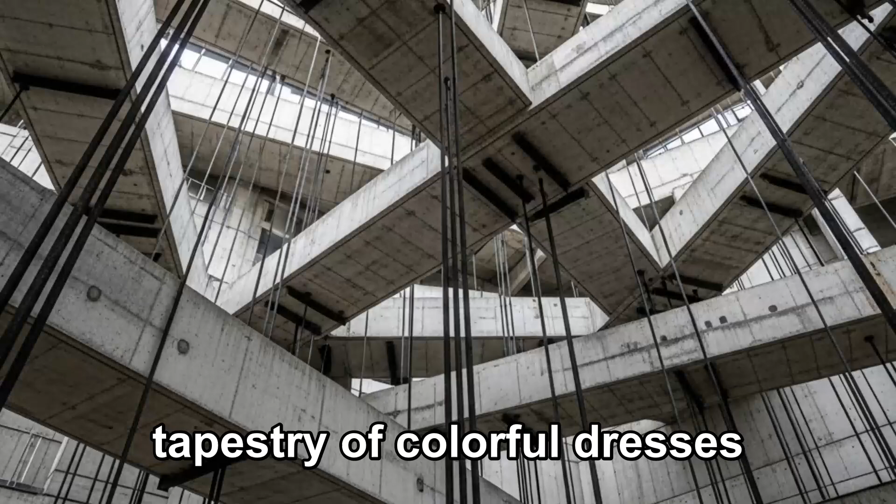Imagine a room filled with the warm, brassy sounds of a big band orchestra. It is July 17, 1981 at the Hyatt Regency in Kansas City, Missouri. More than 1,600 people have gathered in the hotel's soaring, sun-drenched atrium for a tea dance, a nostalgic celebration of music and movement. The atmosphere is electric, a vibrant tapestry of colorful dresses and sharp suits. Couples are swirling on the ground floor, while hundreds more lean against the railings of the majestic suspended walkways that crisscross the lobby high overhead.

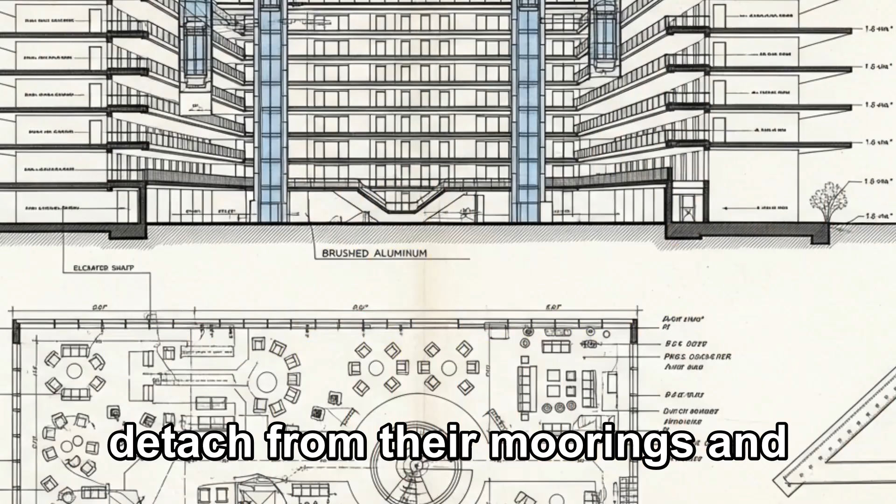Then, at exactly 7:05 p.m., the music is punctuated by a sound like a high-powered rifle shot. It is the sound of steel screaming under impossible pressure. Within seconds, a massive shadow falls over the dance floor. Two concrete and steel walkways, weighing tens of thousands of pounds, detach from their moorings and plummet through the air, pancaking on top of one another before crushing the crowd below. Dust fills the air, thick and gray like a fog, turning a scene of celebration into a graveyard of twisted metal and shattered glass. This was not a natural disaster, it was not an act of God.

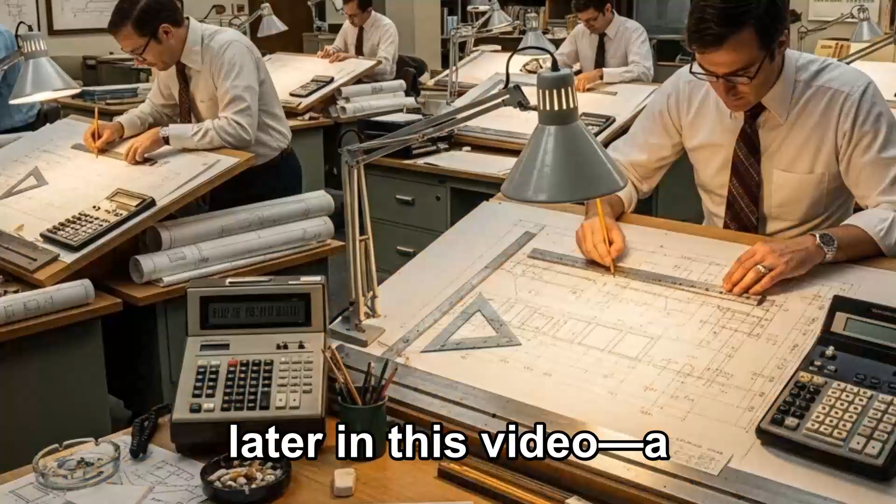It was the deadliest structural failure in United States history until the collapse of the World Trade Center towers 20 years later. But the most chilling part of this story isn't just the finality of the collapse, it is the revelation we will uncover later in this video, a revelation that proves this entire tragedy was caused by a simple, minor change to a drawing that a professional engineer failed to double-check. A mistake so basic that a first-year physics student could have spotted it, yet it remained hidden in plain sight for over a year.

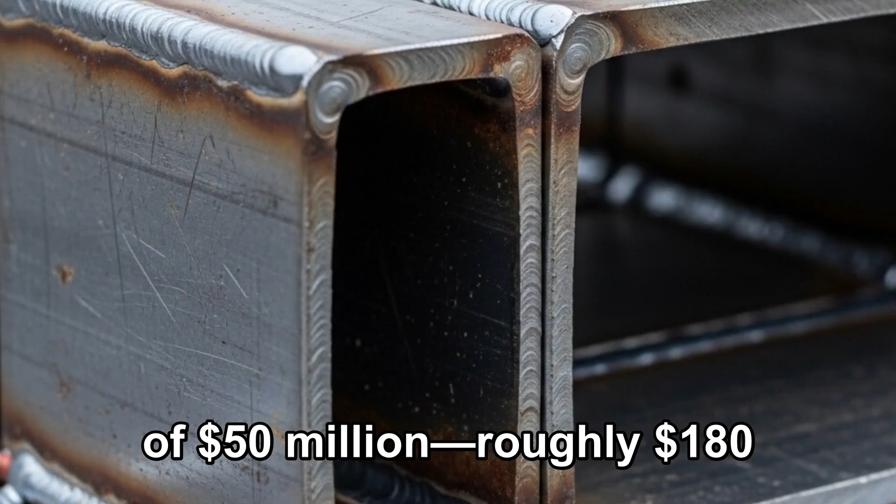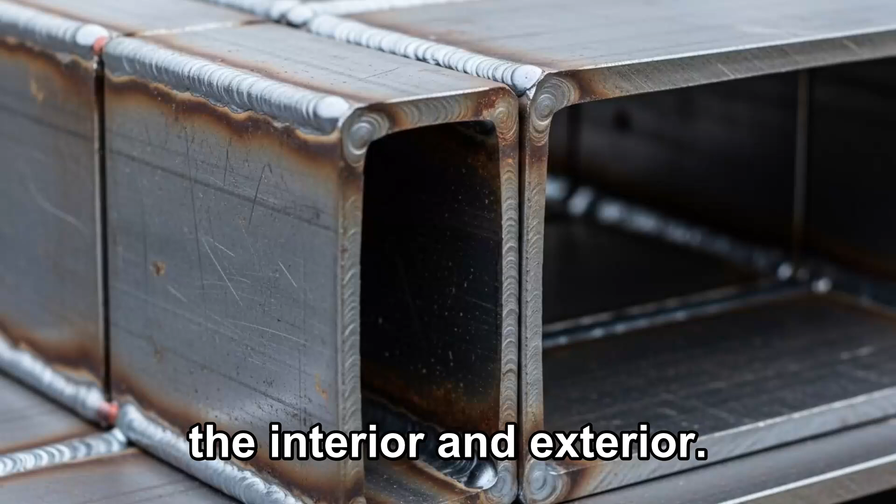The Hyatt Regency Kansas City was more than just a hotel, it was a symbol of urban renewal and architectural ambition. Completed in 1980 at a cost of $50 million, roughly $180 million in today's money, it was the crown jewel of the city skyline. The hotel consisted of a massive 40-story guest tower and a sprawling 4-story lobby known as the atrium. This atrium was designed to be an urban square, a public space that blurred the lines between the interior and exterior. The centerpiece of this architectural marvel was a series of 3 suspended walkways that spanned the vast open space.

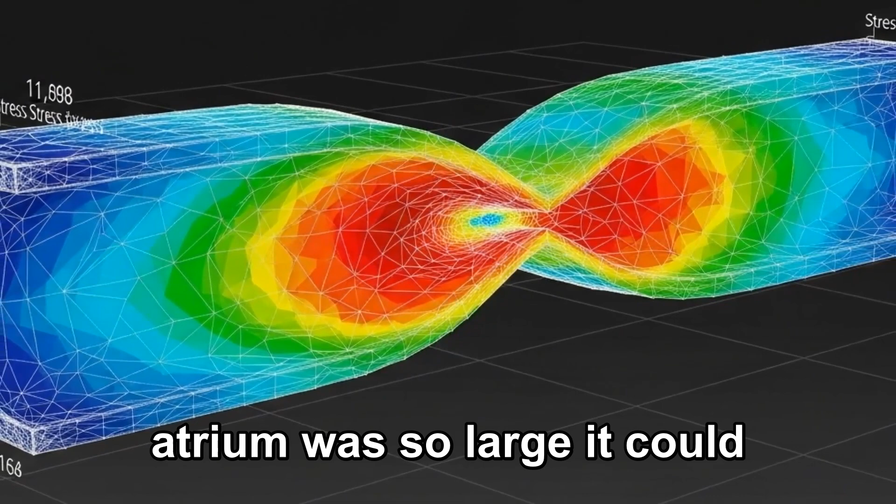These weren't just functional corridors, they were engineering statements. They allowed guests to walk through the air, looking down at the activity below like spectators in a grand theater. To give you an idea of the scale, the atrium was so large it could comfortably house 3 Boeing 747 aircraft parked wingtip to wingtip. The ceiling reached 40 feet into the air, supported by a sophisticated network of steel trusses and expansive glass panels that flooded the space with natural light.

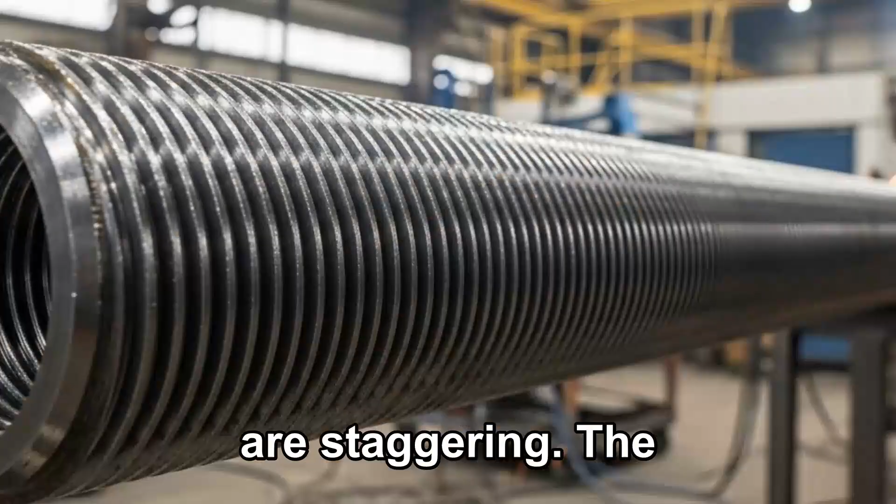The walkways themselves were ribbons of concrete and steel, each stretching 120 feet across the void, nearly half the length of a professional football field. Let's look at the numbers because they are staggering. The 4th-floor walkway alone, constructed from heavy steel beams and thick concrete slabs, weighed approximately 64,000 pounds. To put that into perspective, that is the equivalent of 5 fully grown African bush elephants, or a fleet of 20 mid-sized sedans suspended by nothing but thin steel rods.

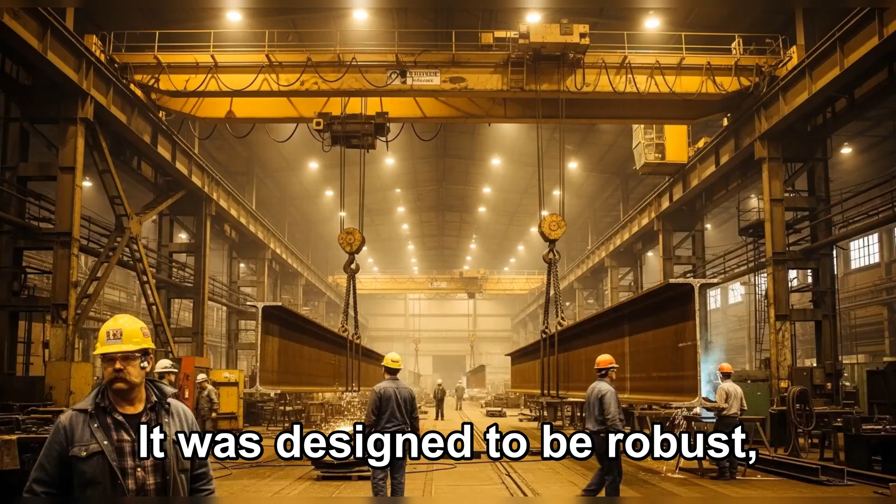These walkways were designed to be masterpieces of load distribution, a term engineers use to describe how weight is moved from a structure into the ground. They were suspended from the ceiling by 6 massive steel hanger rods, each 1¼ inches in diameter. On paper, these rods were the lifelines of the structure, designed to carry the dead load of the walkway itself and the live load of hundreds of people. The safety factor, the margin of error built into the design to prevent failure, was supposed to be high. The city's building codes required these walkways to support 100 pounds per square foot. It was designed to be robust, resilient, and, above all, safe.

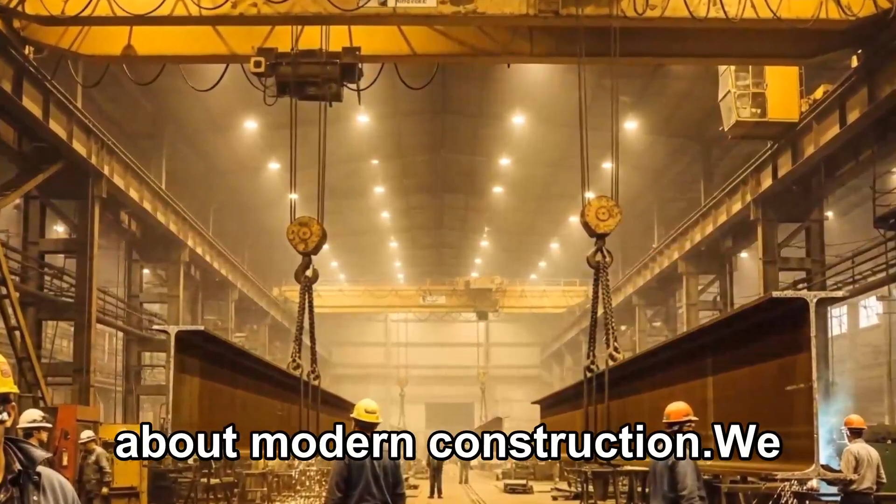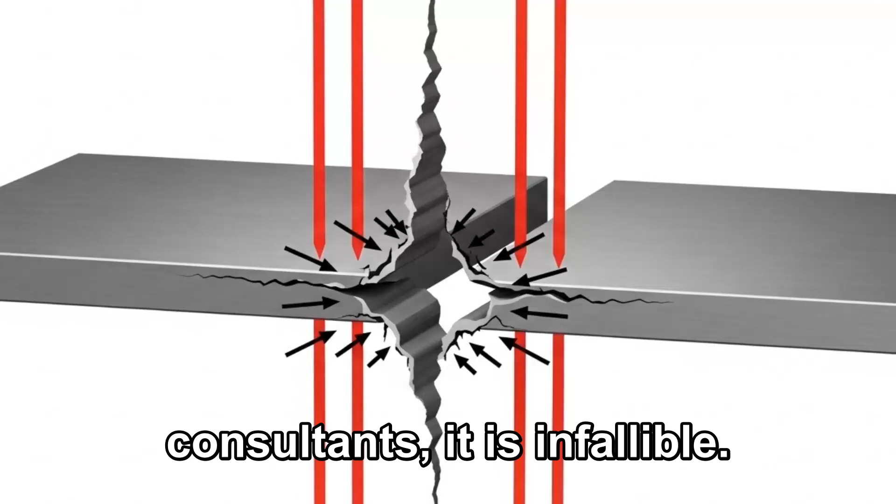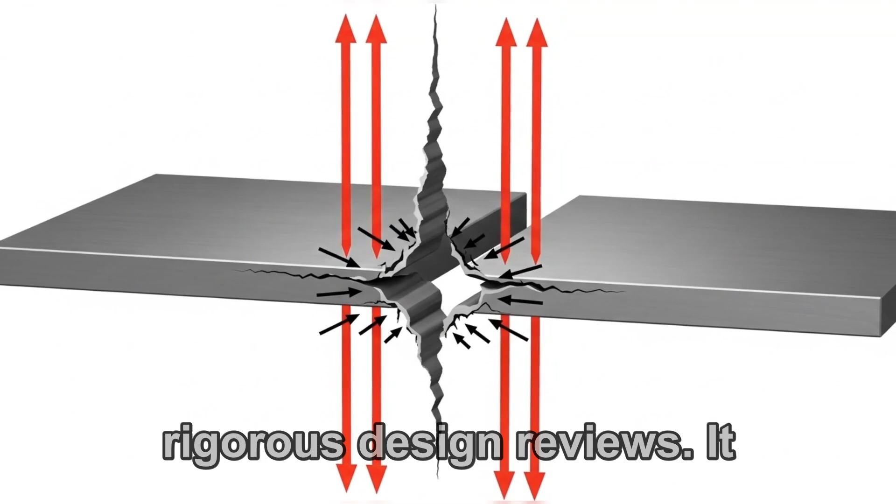The tragedy of the Hyatt Regency is amplified by the fact that it shattered every assumption we have about modern construction. We often assume that if a building is massive, it is strong. We assume that if a project is handled by prestigious architectural firms and world-class engineering consultants, it is infallible. We assume that because the city issued a certificate of occupancy, every bolt and weld was inspected and verified. The Hyatt Regency was all of those things. It was a state-of-the-art facility, it had undergone rigorous design reviews, it was built by experienced contractors.

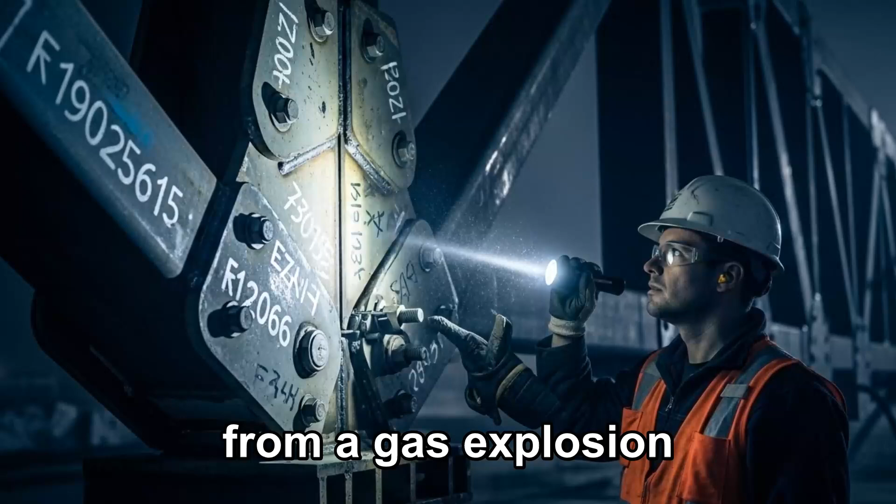And yet it failed spectacularly during a routine event. It wasn't hit by an earthquake or a hurricane. It didn't suffer from a gas explosion or an arsonist's fire. It simply fell down under the weight of its own existence and the people it was meant to serve.

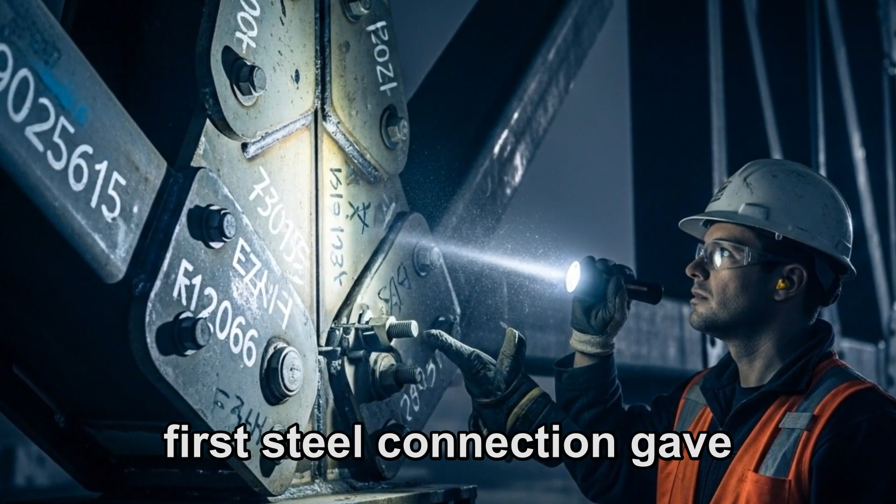The collapse was so sudden and so violent that there was no point of no return. The moment the first steel connection gave way, the entire system became a death trap.

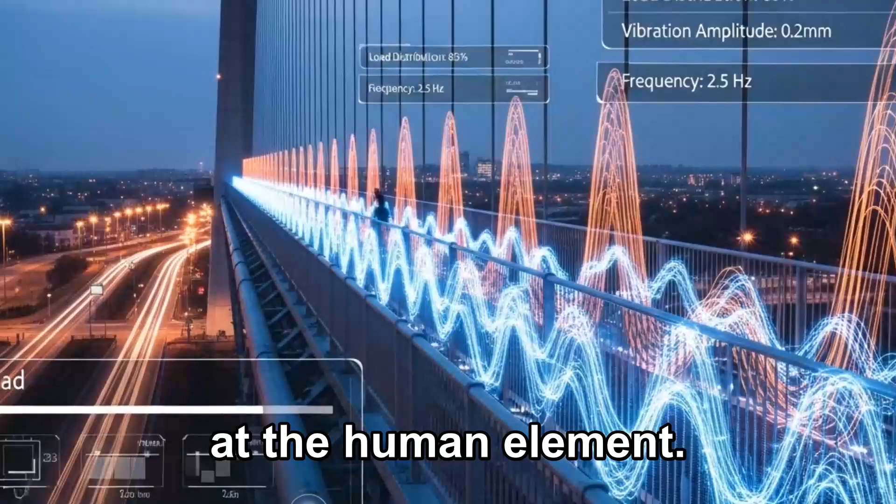As we move forward, we have to look past the beautiful glass and the polished granite to see the invisible forces at play. We have to understand how the yield strength of steel, the point at which a material stops stretching and starts breaking, was tested to its absolute limit that night. We have to look at the shear force applied to the bolts and the way the concrete acted as a giant hammer. But more importantly, we have to look at the human element, the decisions made in quiet offices months before the first dancer stepped onto the floor.

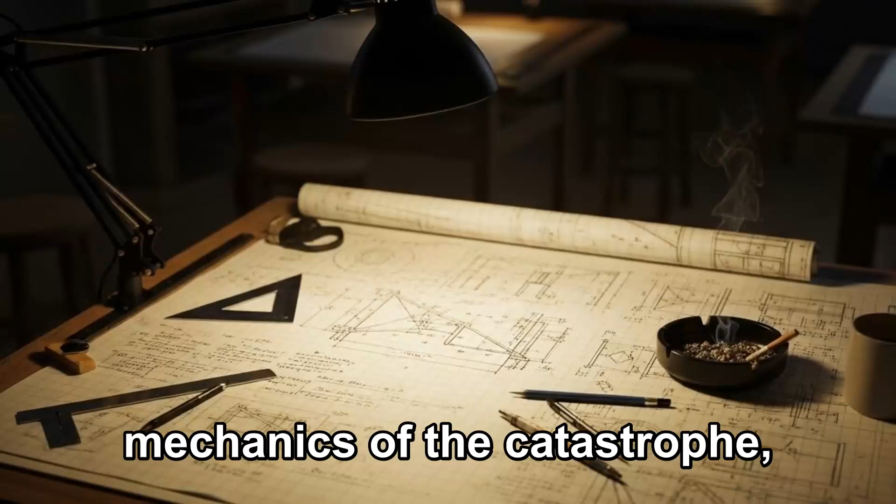Because while the physics of the collapse are clear, the chain of human error is what truly haunts the history of engineering. Before we get into the mechanics of the catastrophe, remember this: the Hyatt Regency was considered a triumph of modern design, right up until the millisecond the ceiling began to tear apart. Stay with us, because what the investigators found in the wreckage changed the world of engineering forever, and it all started with a single phone call that went ignored.

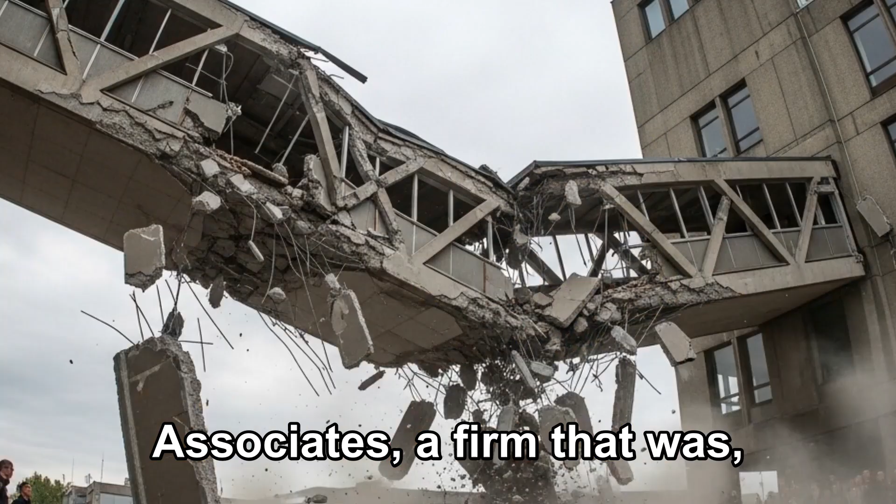To understand why those walkways fell, we have to look away from the dust of the lobby and into the quiet, high-pressure offices of the structural engineers and steel fabricators who designed it. The project's engineering was handled by Jack D. Gillum and Associates, a firm that was, at the time, a leader in the industry.

But in the late 1970s, the fast-track construction method was becoming popular, a system where construction begins before the final designs are even completed. This environment of haste created the perfect breeding ground for a minor clerical oversight that would eventually kill 114 people.

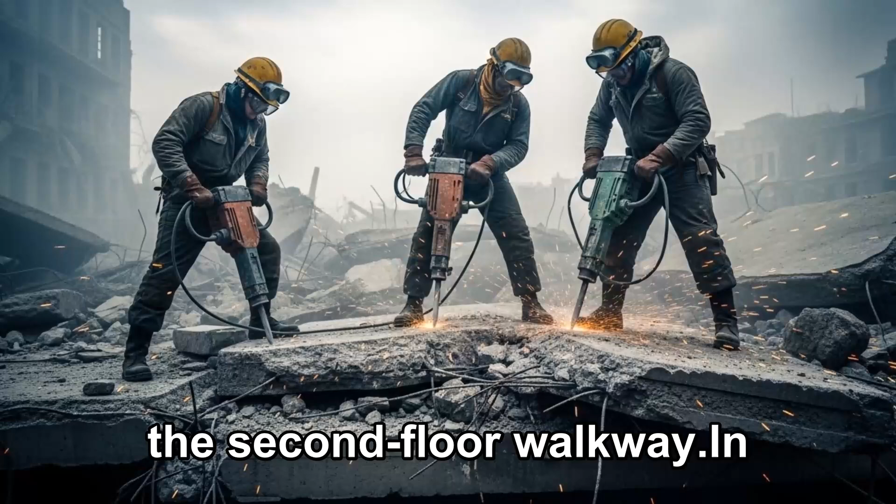The original blueprints for the Hyatt Regency featured a design that was elegant and fundamentally sound. It called for 6 continuous 1¼ inch thick steel hanger rods to run from the heavy ceiling trusses all the way down to the second-floor walkway. In this single-rod design, the 4th-floor walkway and the 2nd-floor walkway would both hang from the same set of rods independently.

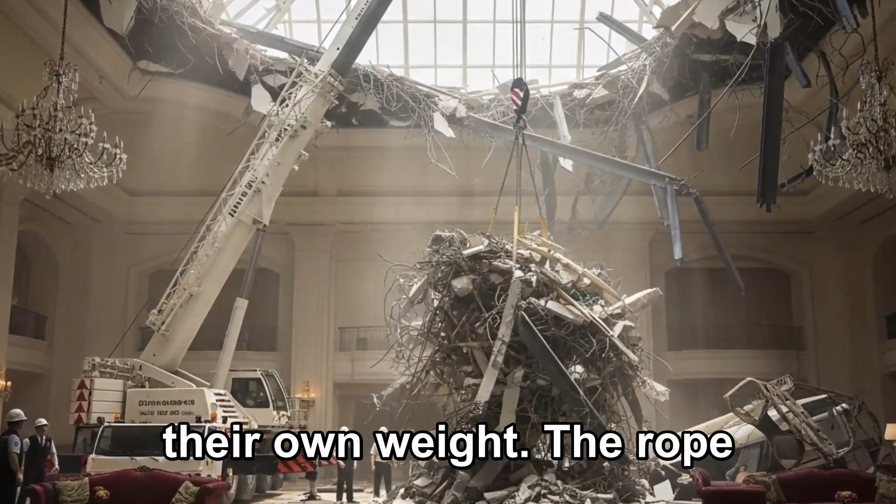Imagine a single long rope hanging from a tree branch with 2 people holding onto it at different heights. The person at the top only has to hold their own weight, and the person at the bottom only has to hold their own weight. The rope itself carries the total load, but the individual grips of the people are independent. This design had a massive load capacity and met all Kansas City building codes with a comfortable safety margin.

However, when the plans reached the manufacturer, Havens Steel Company, they flagged a major logistical problem. They didn't have the capability to thread a 45-foot-long steel rod across its entire length without damaging the threads or using incredibly expensive specialized machinery.

To simplify the assembly, Havens proposed a change. Instead of 1 long rod, they would use 2 shorter offset rods. One rod would connect the ceiling to the 4th-floor walkway, and a second separate rod would hang from the 4th-floor walkway down to the 2nd floor.

On a busy morning in early 1979, a technician at the engineering firm received a phone call about this change. Without performing a single new calculation or sketching the physics of the new arrangement, the firm gave the green light. They treated a fundamental structural shift as a mere shop drawing revision. This was the fatal turning point.

By switching to a 2-rod system, the engineers inadvertently doubled the stress on the 4th-floor beam connections. In the new configuration, the 4th-floor walkway was no longer just hanging from the ceiling, it was now acting as the anchor for the walkway below it.

To return to our analogy, instead of 2 people holding a rope separately, the person on the bottom is now hanging onto the ankles of the person above them. Now the person at the top has to support not only their own weight, but the entire weight of the person dangling below.

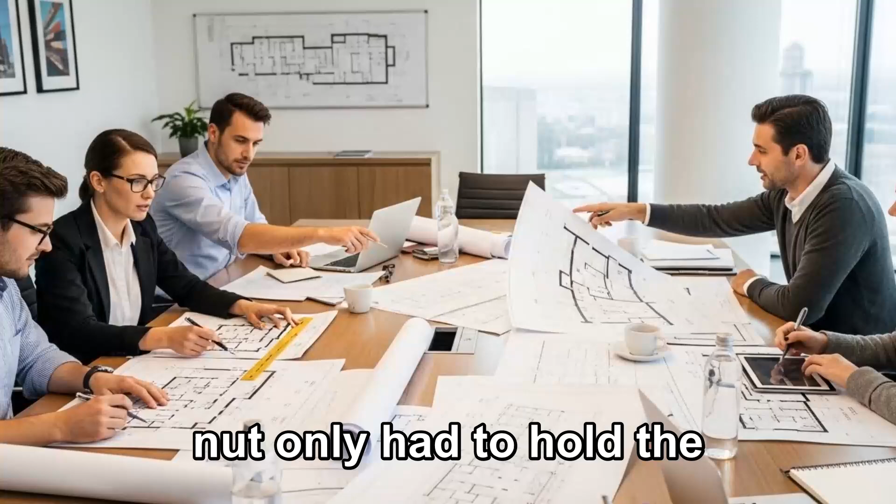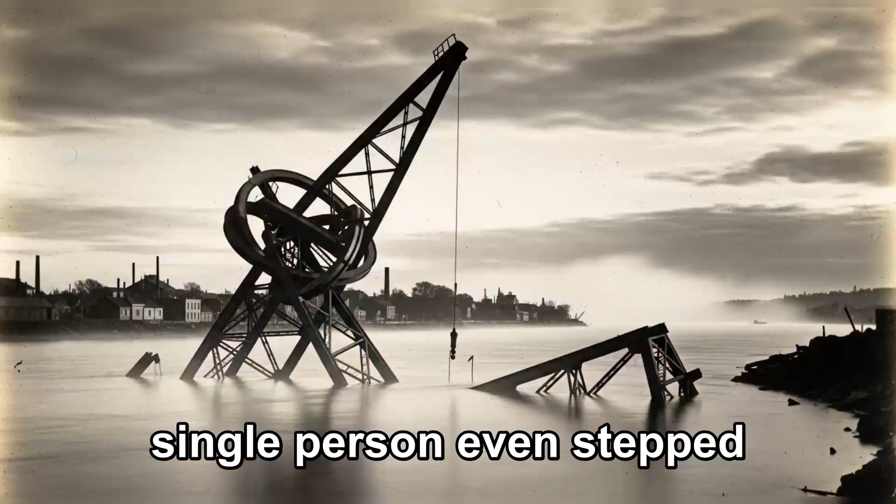In the revised design, the shear force, the force trying to slide the rod through the beam, was doubled. The steel was literally being pushed to its yield strength before a single person even stepped onto the hotel's property.

The load capacity of the connection, which should have been at least 30,000 pounds to be safe, had been accidentally slashed to less than 8,000 pounds.

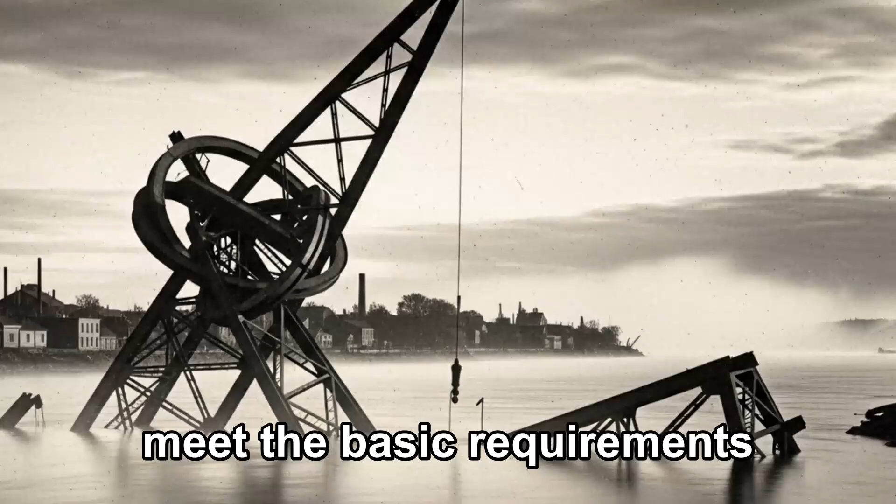Even more terrifying is that the design didn't just fail to meet the extra safety requirements, it failed to meet the basic requirements of the weight of the concrete itself. The dead load, the weight of the walkways when empty, was already stressing the steel to nearly 100% of its capacity. There was no room for live load, which includes the people, the wind load from the atrium's ventilation system, or the rhythmic vibrations of a dancing crowd.

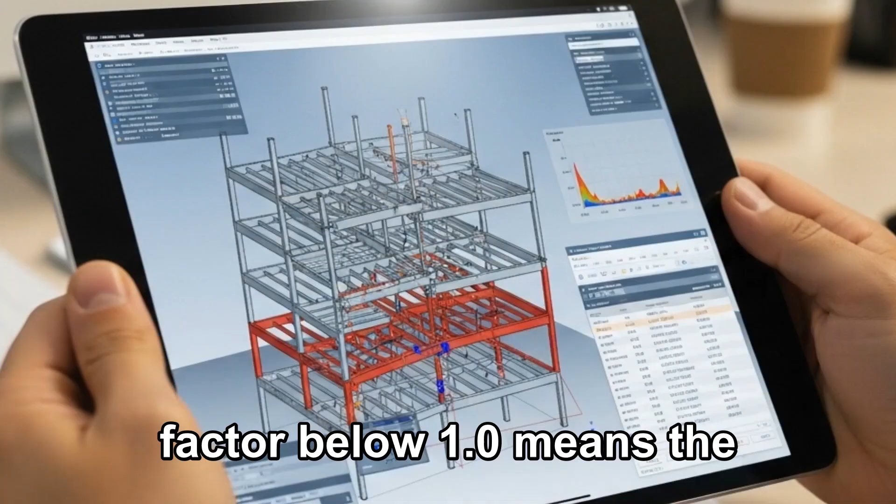Engineers often use a safety factor of 2.0 or 3.0, meaning the structure is 200% to 300% stronger than it needs to be. The Hyatt walkways after the design change had a safety factor of approximately 0.6. In the world of engineering, a safety factor below 1.0 means the structure is already in a state of active failure. The metal fatigue wasn't the primary killer here, it was a total structural bypass.

During the investigation, it was discovered that the box girders were so weak that the nuts were literally pulling through the steel plating. As the dancers moved to the music on that July night, they were unknowingly creating a dynamic load. Every step, every synchronized movement of the crowd sent waves of energy through the steel.

The angle of inclination of the rods began to shift as the beams warped under the impossible pressure. We are talking about tens of thousands of pounds of concrete and steel hanging by a literal thread of misinterpreted mathematics. There was one final warning sign that the world ignored.

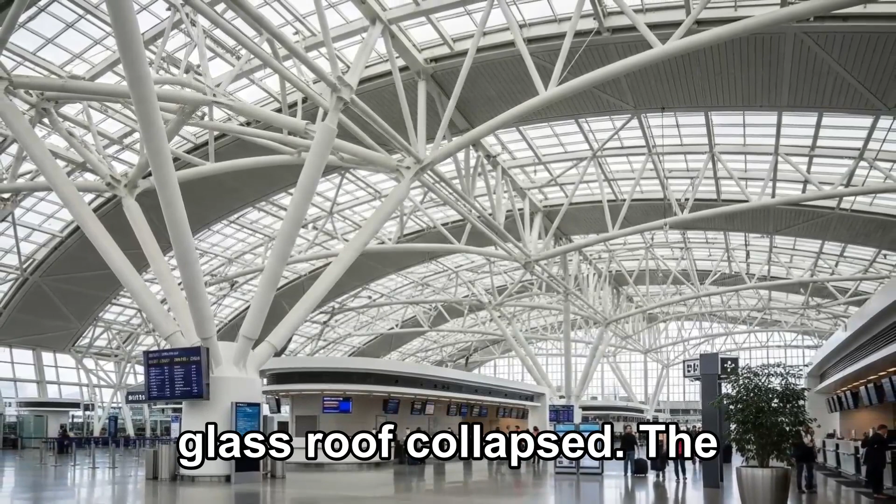In October 1979, during the hotel's construction, a 2,700 square foot section of the atrium's glass roof collapsed. The engineers blamed a faulty connection in the roof trusses and performed a quick inspection of the rest of the building, but they were looking for errors in the roof, not the walkways.

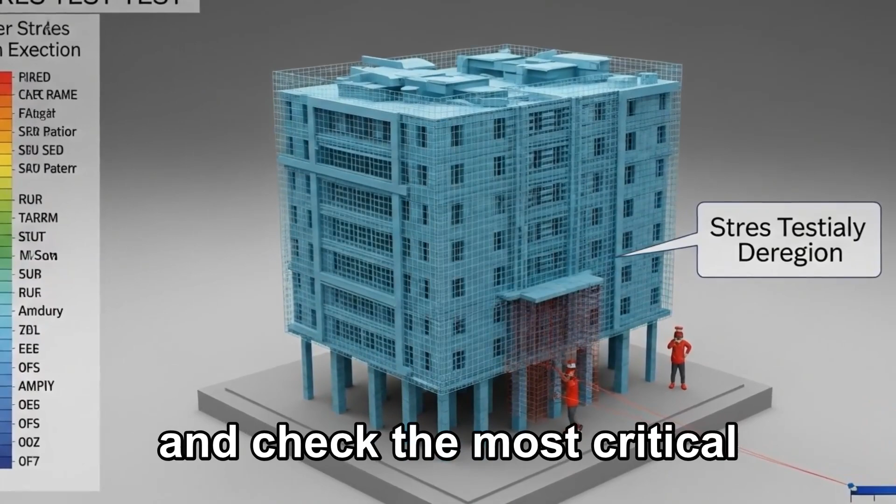They were so confident in their computerized models and their professional status that they never bothered to walk over to the walkways and check the most critical connections in the building. They had multiple chances to see the bowing of the steel beams, but they were blinded by their own assumptions.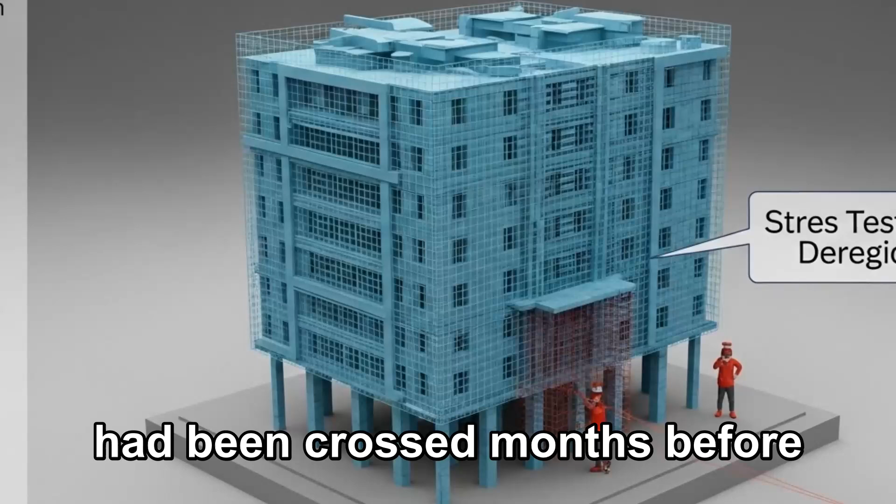The point of no return had been crossed months before the first guest checked in. The clock was ticking, and all it took was the sound of a big band orchestra to bring the whole house down. At exactly 7:05 p.m., the music of the Steve Miller Orchestra was playing an upbeat rendition of Satin Doll.

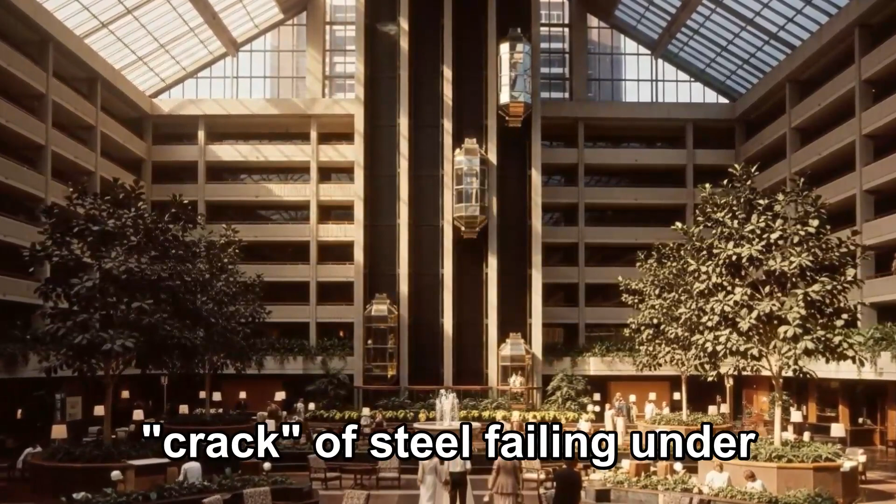The lobby was a kaleidoscope of movement, with over 1,600 people filling the floor and the overhead bridges. Then the atmosphere shattered. Witness accounts describe a sound like a high-velocity rifle shot, the crack of steel failing under tension. On the fourth floor walkway, the connection at the middle set of hanger rods simply gave way.

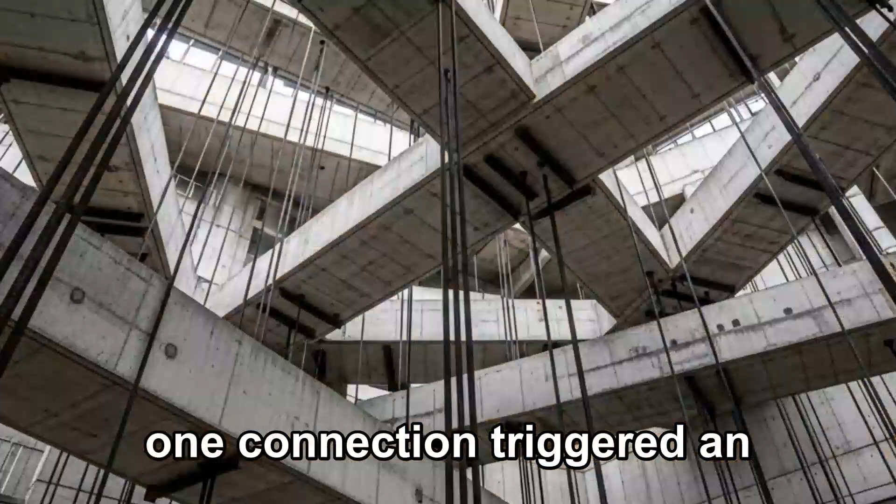Because the structure was now interconnected in a deadly chain, the failure of one connection triggered an instantaneous progressive collapse. The fourth floor walkway, weighing 64,000 pounds, roughly the weight of a fully loaded semi-truck, plunged vertically. It fell 15 feet onto the second floor walkway directly beneath it.

The second floor structure, already strained to its breaking point, stood no chance. It was instantly crushed, and the combined mass of nearly 130,000 pounds of concrete, steel, and human beings slammed into the crowded dance floor below.

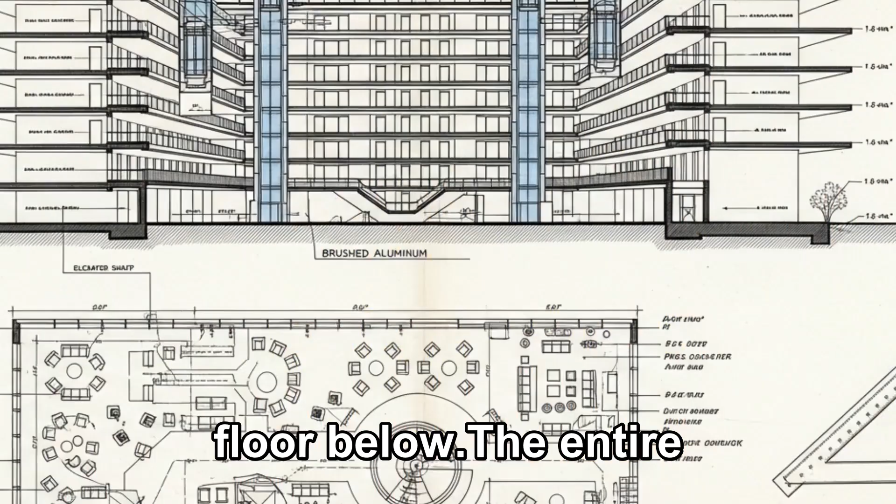The entire collapse took less than 5 seconds. In the time it takes to draw a single breath, a palace of modern luxury became a scene of industrial carnage.

The sound was deafening, a roar of grinding metal followed by a thud that vibrated through the very bedrock of Kansas City. Then there was silence, quickly replaced by the sound of high-pressure water lines bursting. Gallons of water began to flood the lobby, rising around those trapped under the debris.

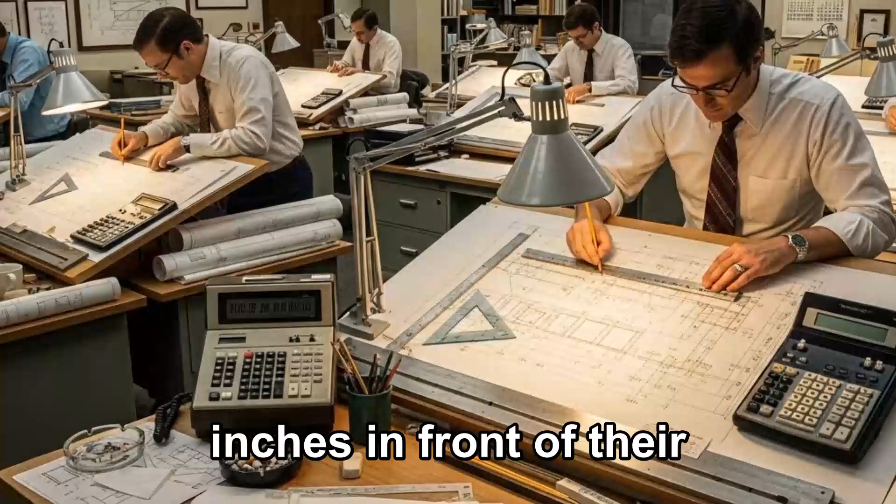Dust from the pulverized concrete hung in the air like a thick, gray curtain, making it impossible for survivors to see more than a few inches in front of their faces. This wasn't just a building failure, it was a physical pancake effect, where the weight of the upper floors added kinetic energy to the destruction of the lower ones.

The human cost was staggering. 114 people were killed and 216 were injured. Many of the victims were prominent members of the community, doctors, teachers, and business owners.

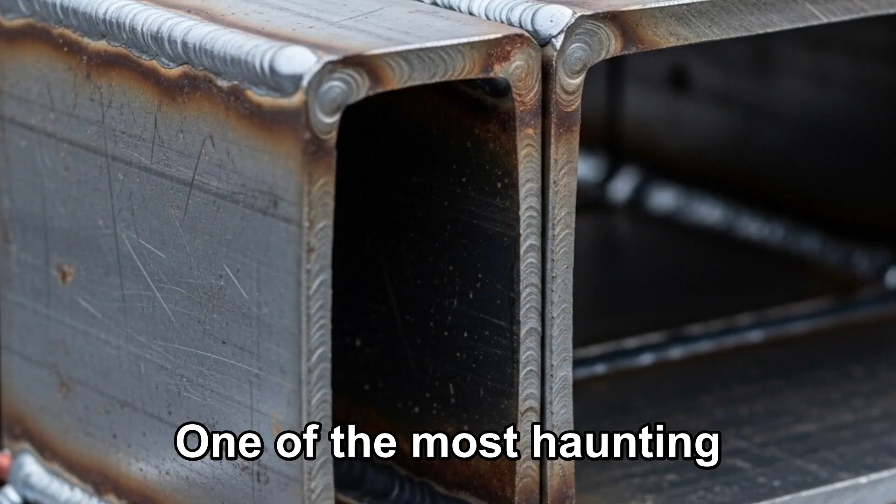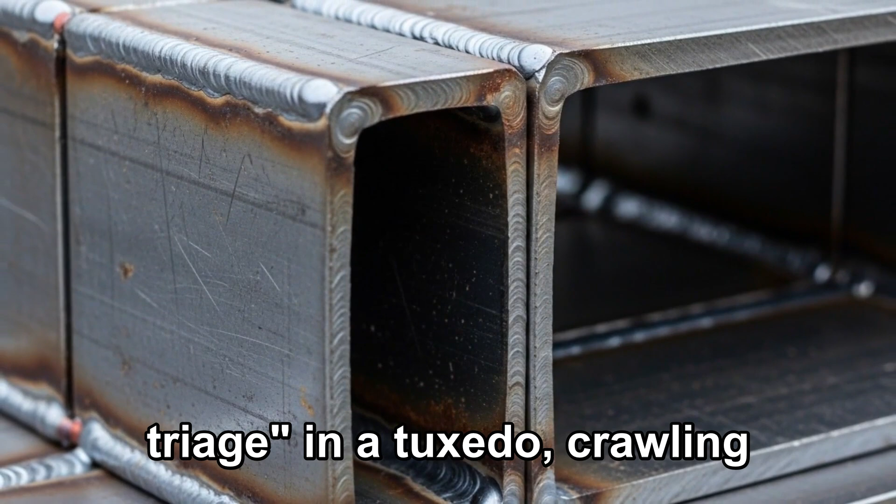One of the most haunting stories is that of Dr. Joseph Waeckerle, the director of the local emergency department, who was actually attending the dance. He found himself performing battlefield triage in a tuxedo, crawling through the twisted wreckage to reach those pinned beneath the slabs.

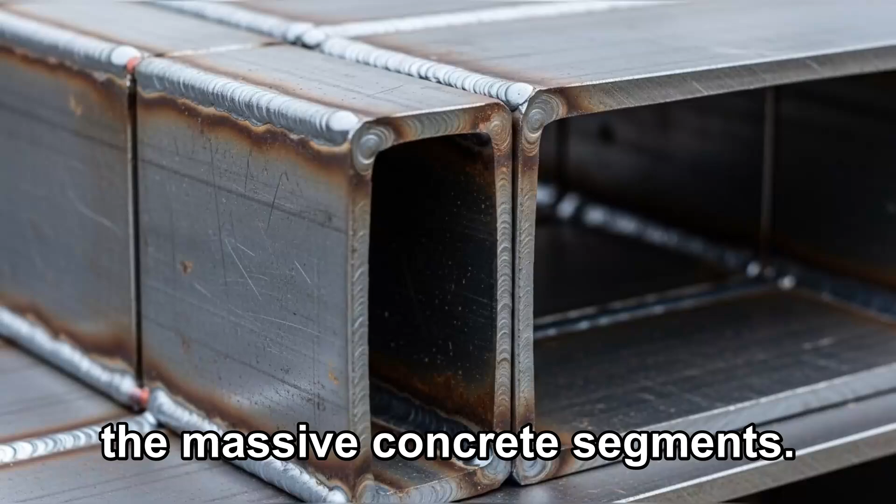Rescue workers had to use jackhammers and even a crane to lift the massive concrete segments. To understand the weight they were dealing with, one single slab of the walkway was as heavy as 4 school buses. It took nearly 14 hours to extract the last survivor from the ruins.

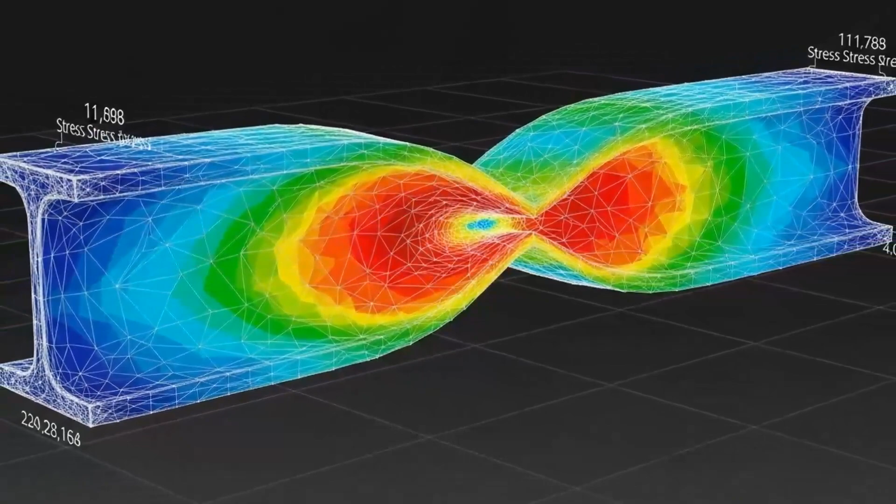The investigation that followed was one of the most exhaustive in the history of the National Bureau of Standards (NBS). Lead investigator Edward Pfrang and his team treated the atrium like a giant crime scene. They quickly focused on the box girders, the steel beams that the hanger rods passed through.

When they examined the wreckage, they found a chilling piece of evidence. The steel plates where the rods were secured had been deformed into a tulip shape. The nuts and washers had literally been pulled through the solid steel of the beams.

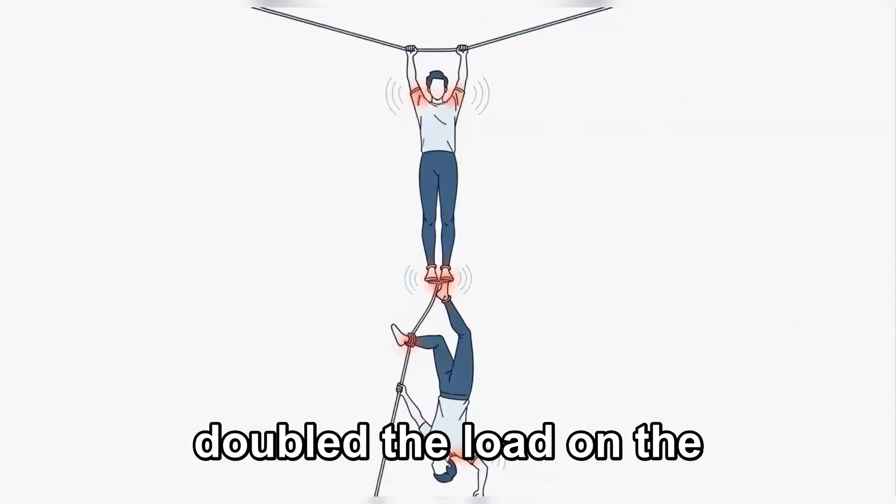This confirmed their darkest suspicion. The connection didn't fail because of a manufacturing defect in the steel. It failed because the design change from a single rod to a double rod system had doubled the load on the connection, pushing it past its ultimate tensile strength.

The NBS report was a stinging indictment of the engineering process. It revealed that the walkway design as built could only support 30% of the load required by the Kansas City Building Code. This means the structure was failing from the moment it was finished.

It was so weak that the weight of the people dancing was simply the final straw for a system that was already in a state of terminal stress.

The investigation didn't just look at the physics, it looked at the communication protocols. They discovered that the engineering firm Jack D. Gillam and Associates had signed off on the fabricator's revised shop drawings without ever performing the math to see if the new two-rod system was safe.

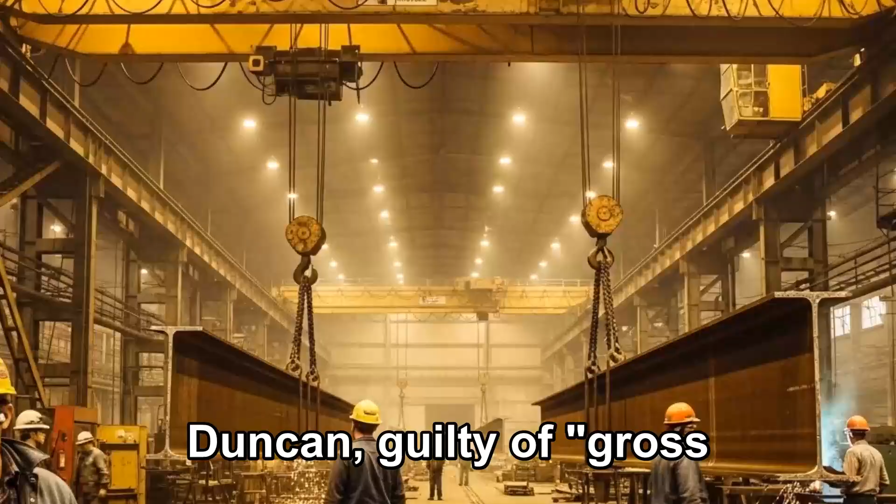The legal and professional fallout was unprecedented. In 1985, the Missouri Board of Architects, Professional Engineers and Land Surveyors found Jack Gillam and his lead engineer, Daniel Duncan, guilty of gross negligence, misconduct and unprofessional conduct. Both men had their professional engineering licenses revoked in the state of Missouri and several other states.

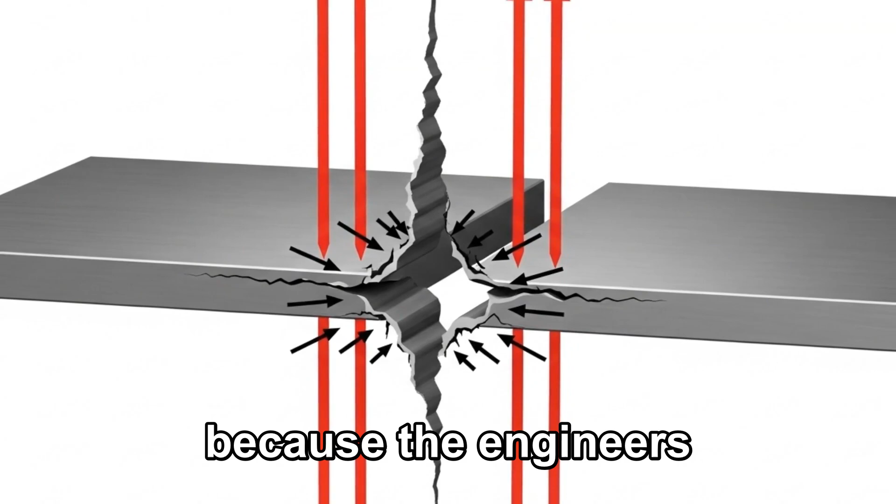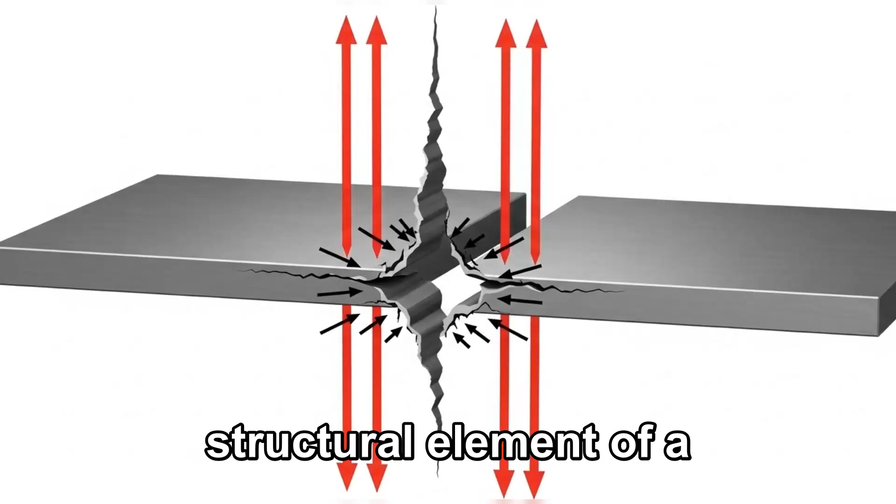It was a landmark case because the engineers were held responsible for the shop drawing errors of the fabricator. The court ruled that the engineer of record bears the ultimate responsibility for every structural element of a building, regardless of who draws the plans or suggests the changes.

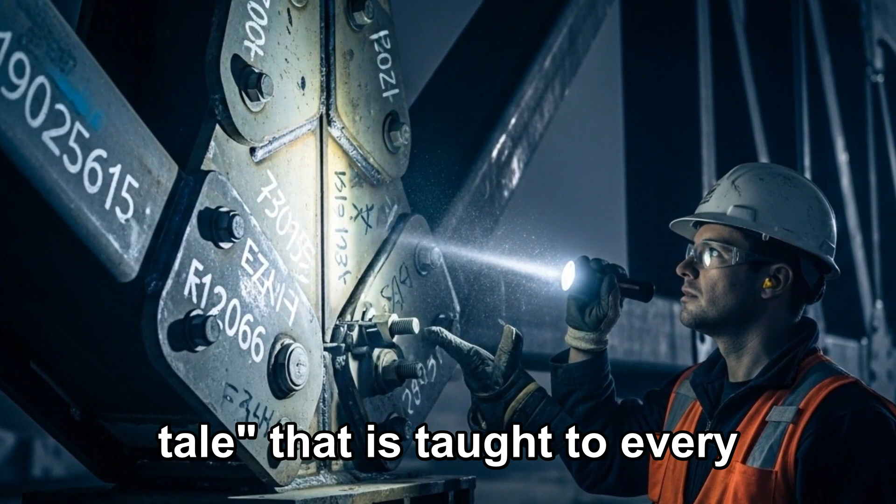Over $140 million, nearly $500 million in today's currency, was paid out in civil settlements to the victims and their families. The Hyatt Regency collapse became a permanent scar on the history of Kansas City and a cautionary tale that is taught to every engineering student in the world today.

The dust settled on the Hyatt Regency lobby, but the shockwaves from the collapse were just beginning to reshape the entire landscape of global engineering. This wasn't just a failure of steel, it was a failure of the professional social contract.

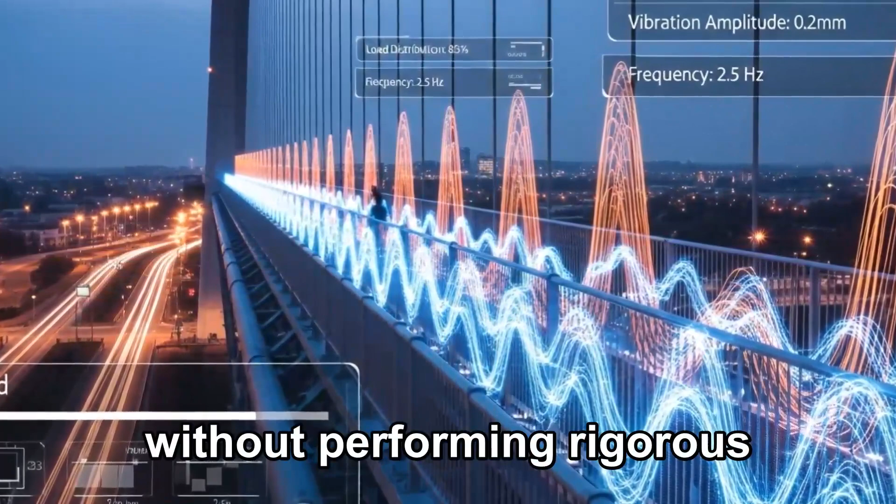Before 1981, the process of reviewing shop drawings, the detailed diagrams created by manufacturers and fabricators, was often treated as a bureaucratic formality. Engineers would frequently stamp these documents with 'approved' without performing rigorous verification, assuming the fabricator had done their own due diligence. The Hyatt tragedy ended that era of complacency forever. It forced the American Society of Civil Engineers, ASCE, to adopt a radical new policy.

The Engineer of Record, EOR, now bears the absolute, non-transferable responsibility for the structural integrity of every single component in a building. If a bolt fails, if a weld snaps, or if a minor change is made to a hanger rod, the legal and ethical liability rests solely on the shoulders of the licensed professional who signed the master plans. This change in legal accountability is why, when you walk through a modern airport or skyscraper today, you are safer than guests were in 1981.

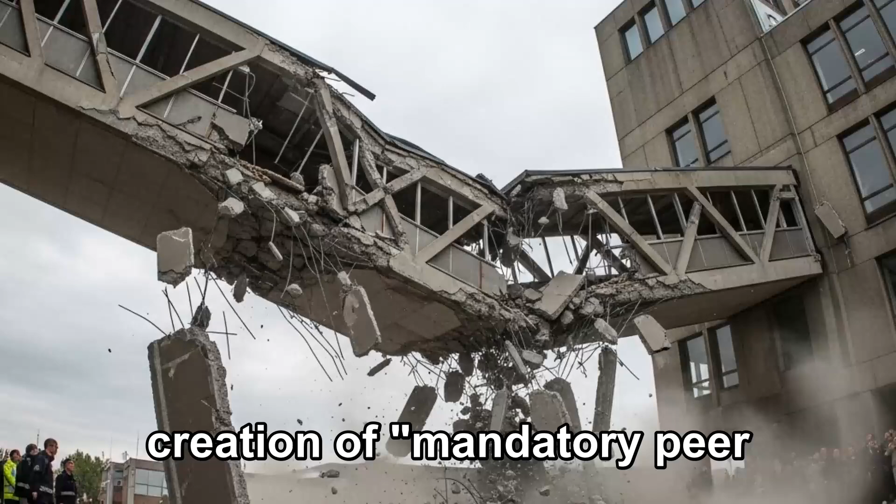The reforms didn't stop at legal liability. The Hyatt collapse led to the creation of mandatory peer reviews for complex structures. Today, if an architect proposes a daring new design, a second, independent engineering firm is often brought in specifically to find the flaws the original team might have missed. This red-teaming of engineering prevents the tunnel vision that led Jack Gillum's firm to ignore the warnings in the atrium.

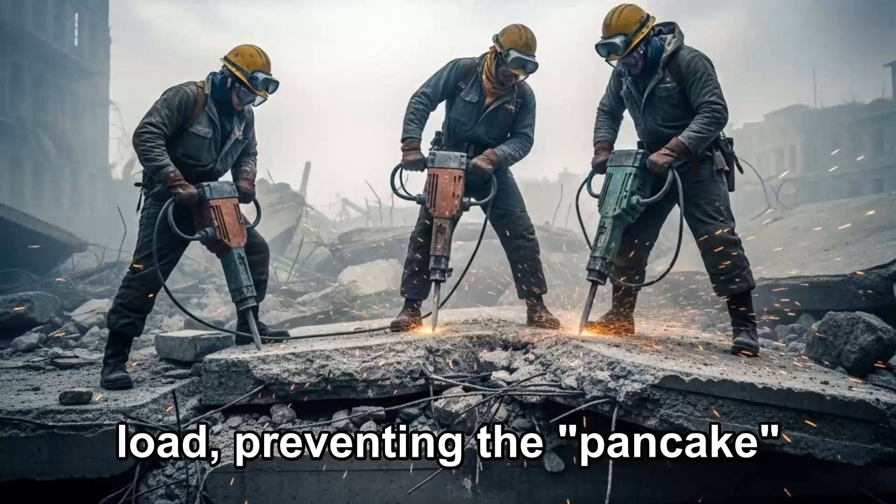Furthermore, building codes across the United States and the world were rewritten to specifically address the progressive collapse phenomenon. Engineers must now design structures so that if one connection fails, the rest of the building can redistribute that load, preventing the pancake effect that proved so deadly in Kansas City. This is often referred to as structural redundancy, the engineering equivalent of having a backup parachute.

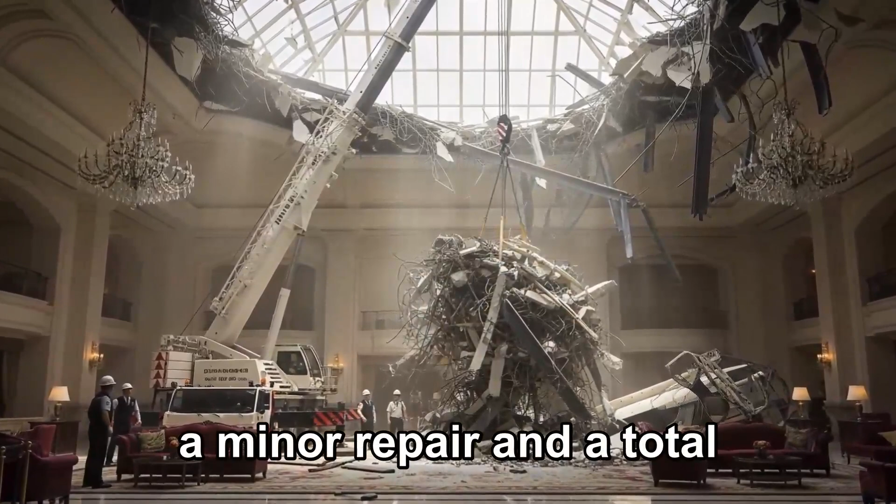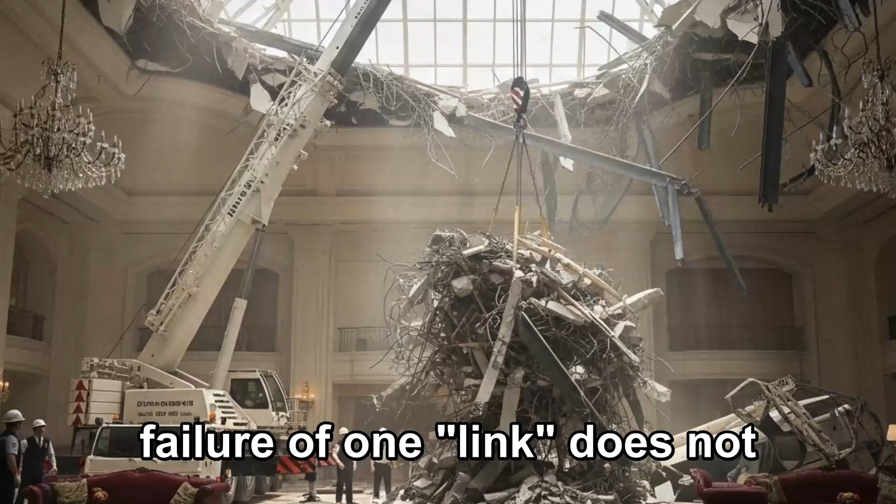That redundancy is the difference between a minor repair and a total catastrophe. To visualize this, think of a bridge held up by many cables versus one held by a single rod. In a redundant system, the failure of one link does not cause the entire chain to snap.

To understand the weight of this legacy, we have to look back at the history of human ambition. The Hyatt Regency was not the first time we learned this lesson the hard way. In 1907, the Quebec Bridge collapsed during construction because engineers underestimated the dead load of the steel, killing 75 workers. In 1940, the Tacoma Narrows Bridge twisted itself apart in the wind because designers didn't account for aerodynamic resonance. Each time the lesson was the same: when we push the boundaries of scale and beauty, the margin for error shrinks to zero.

The Hyatt tragedy is a mirror of systemic decisions. It shows us that a disaster is rarely the result of a single bad apple. Instead, it's a chain of small, seemingly insignificant choices: a rushed phone call, an unverified drawing, a missed inspection, a desire to save time, that eventually align into a perfect storm of failure. It's a reminder that in the world of megaprojects there is no such thing as a minor detail. Every nut, every bolt, and every decimal point is a potential point of failure.

The Hyatt Regency Hotel still stands today, now operating under a different brand name, and the lobby has been completely renovated. The suspended walkways are long gone, replaced by a massive ground-supported second-floor balcony that is physically impossible to collapse in the same way. Just a few blocks away, a memorial stands with the 114 names of the victims etched into stone, a permanent, somber reminder of the true cost of a mathematical error.